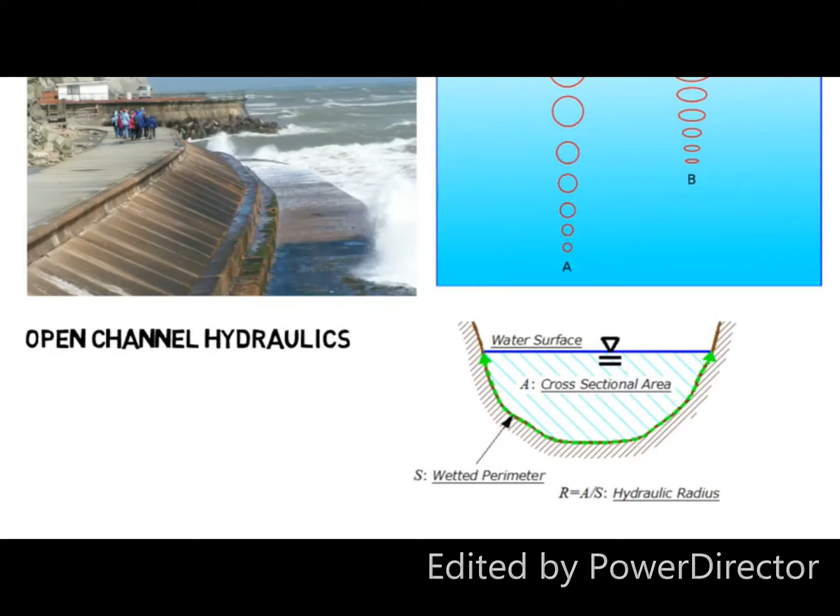And last is transportation engineering. This is about safe and efficient movement of goods and people. These are the engineers who design streets, roads, highways, railroads, public transportation systems, and even airports.

This engineer has to look at the kind of demand from a new development, whether it's a new stadium in your city, all the way to a new grocery store in a new location. This is going to cause new types of traffic throughout the area. The engineers would try to optimize how the new development impacts existing traffic.

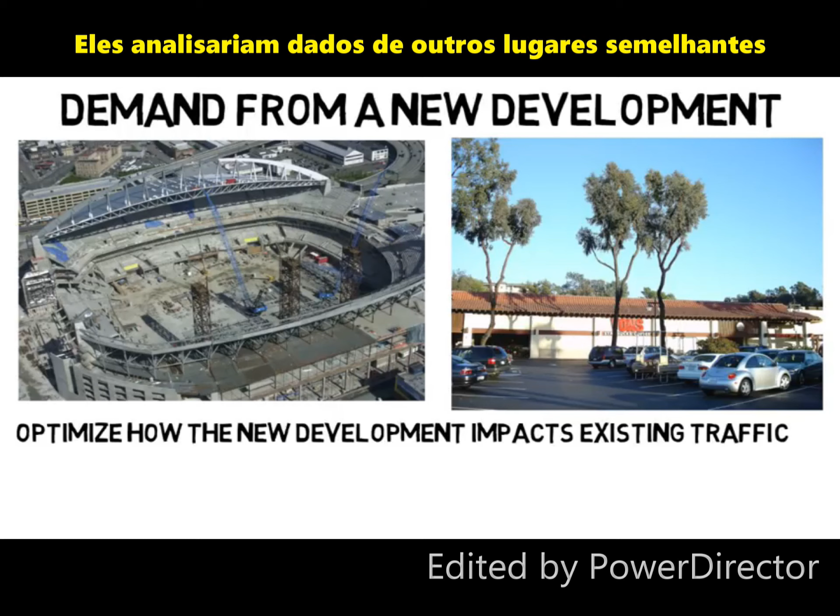They would look at data from other similar places to see what kind of traffic they get, then try to make improvements where possible. It could be simple, like adding a bus stop in the nearby area, all the way to expanding the roadway to allow for more traffic.

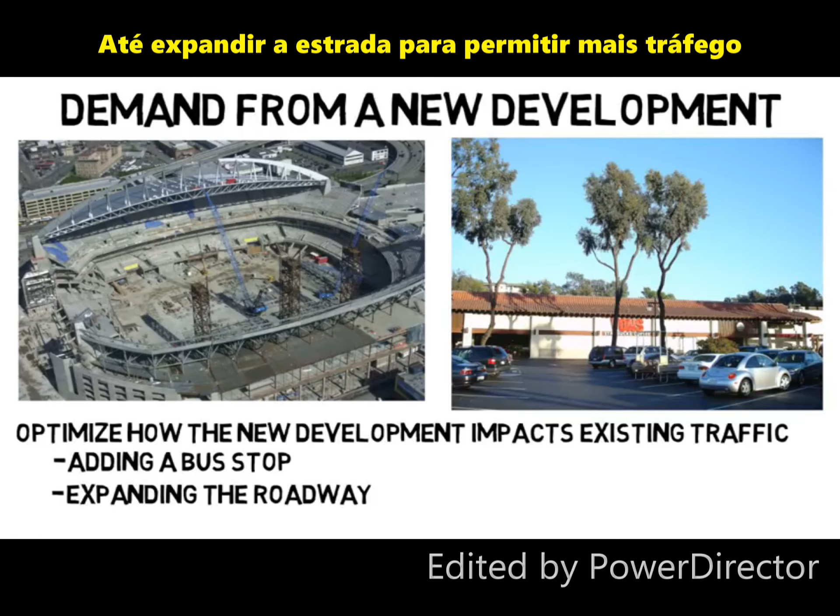They could work on the geometrics of the roadway, such as what radius of curvature an off-ramp needs to be for a car going 55 miles per hour so the tires won't slip. Or if they're going up an incline, the driver needs to see far enough ahead to stop if there's a sudden obstacle. Or what do the cross sections of a freeway need to be for the lanes and the shoulders to accommodate the amount of traffic that's expected?

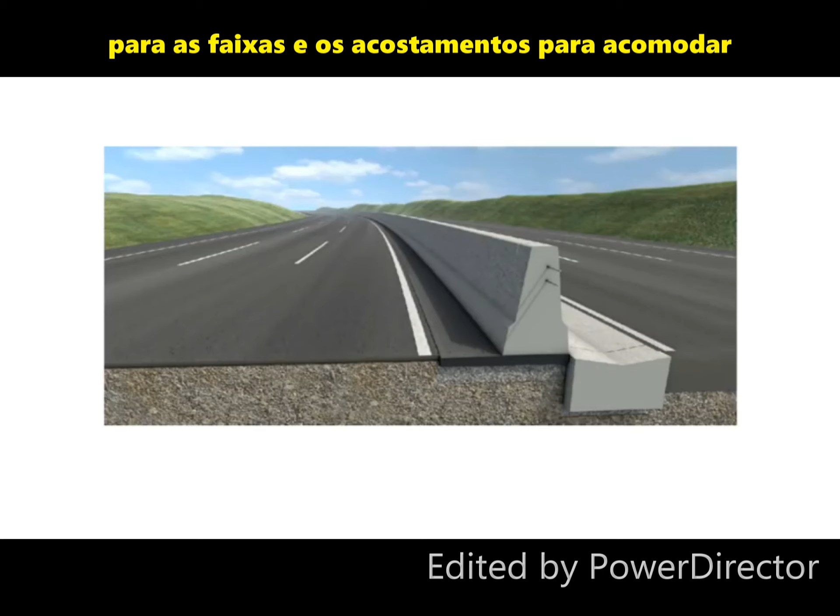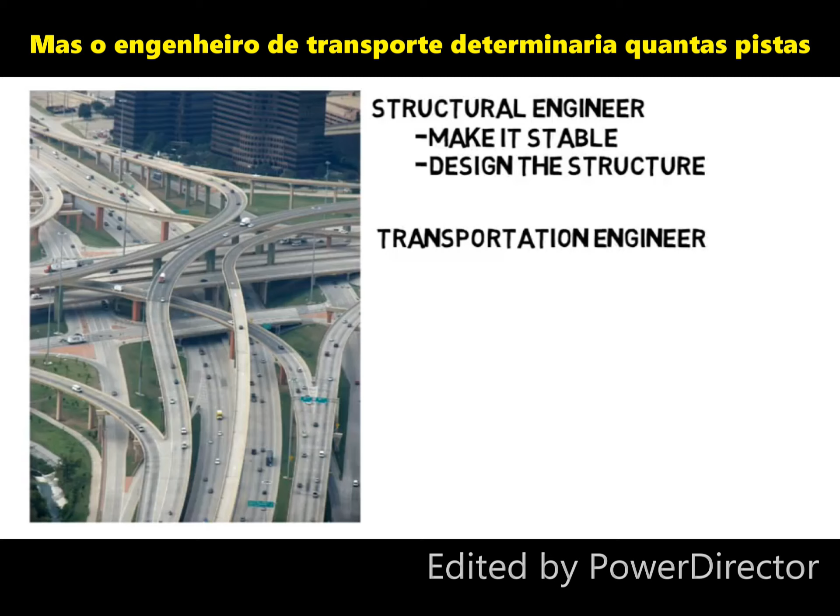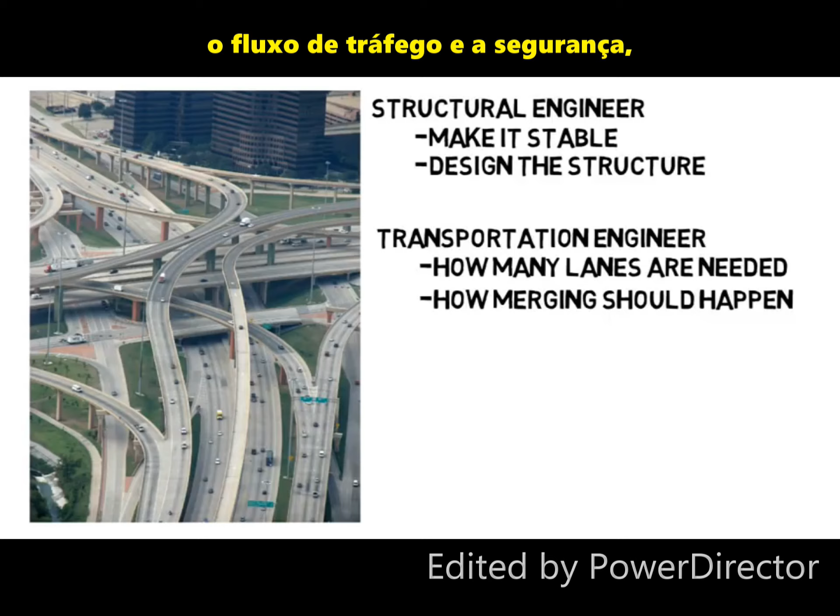Or let's say a highway interchange is being designed. A structural engineer would make it stable and design the structure itself, but the transportation engineer would determine how many lanes are needed based on traffic, or how the merging should happen to maximize safety. They make sure the layout is designed to maximize traffic flow and safety rather than the physics of the structure itself.

Often these engineers evaluate potential improvements to cities in terms of transportation rather than create a totally new design. You probably haven't had many new highways put into your city in the last few years, but there's probably been plenty of construction, whether it be adding an express lane or a bike lane, etc. So they might not create a new bus transportation system, but they may optimize the existing one.

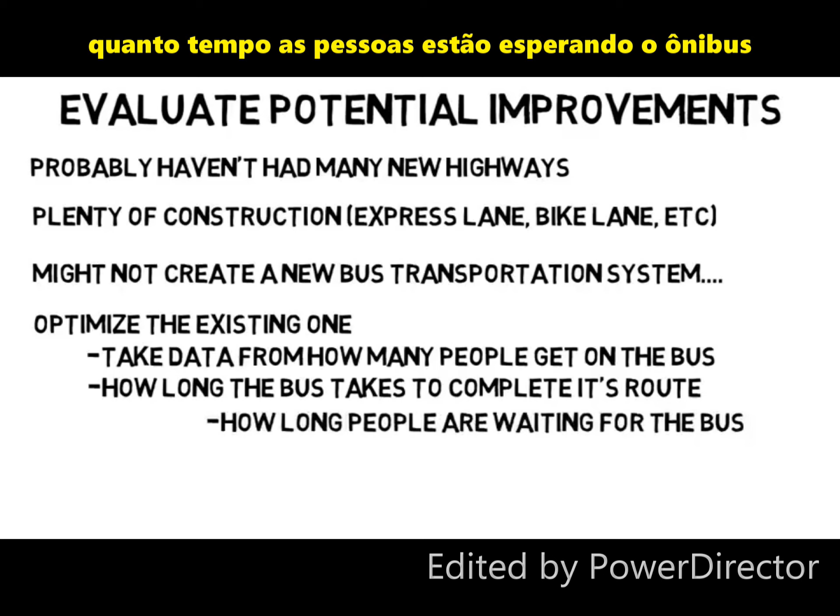Maybe they take data from how many people get on the bus, how long the bus takes to complete its route, how long people are waiting for the bus, and so on to optimize the route, the amount of stops, and more.

Your career will also likely involve a good amount of computer work. You might have to create a layout of the new lane, off-ramp, bridge, or whatever you're designing on AutoCAD, which is a very important software for civil engineers.

Or you could use software to analyze and simulate traffic. You could actually lay out the roadway of a city and use collected data of traffic during different times of the day and simulate new additions. Like you could add in a stoplight somewhere and see what the new traffic would be like. Or you can make a minor change, like making a certain stoplight stay green for just a few seconds longer, and see how it affects traffic on those streets.

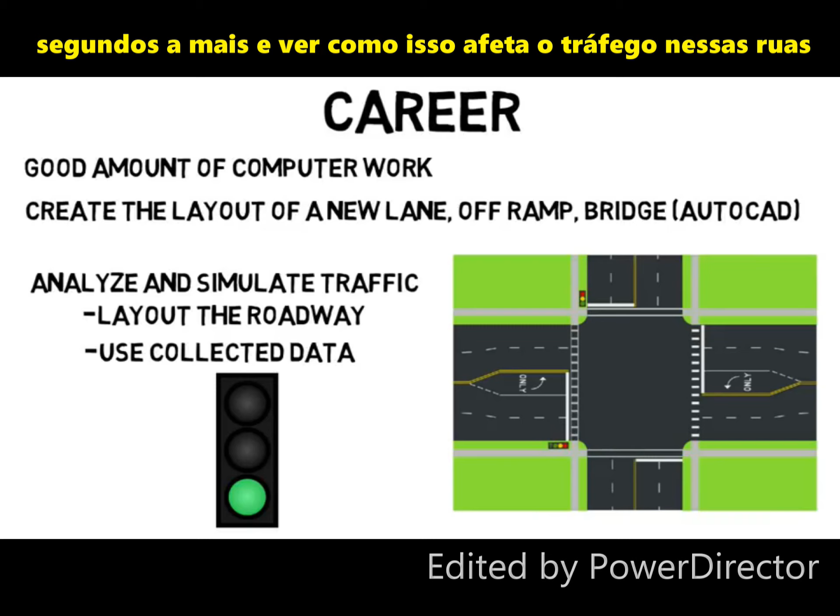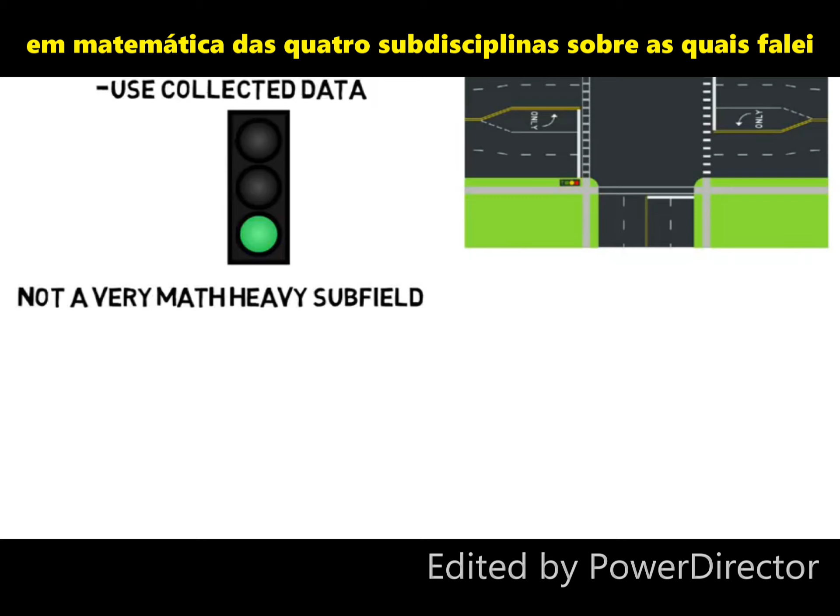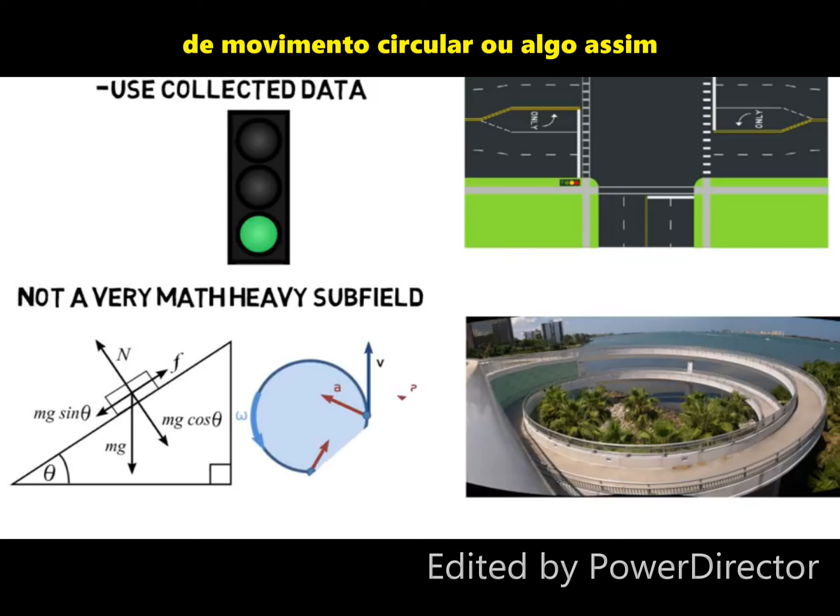Just note, this is not a very math-heavy field. In fact, it's probably the least math-intensive of the 4 subdisciplines I've talked about. It's more about taking data and analyzing it. Even when I talked about the radius of curvature and how fast someone should be going, you won't use the coefficient of friction and do circular motion physics or anything like that. You use even simpler equations to get what you need.

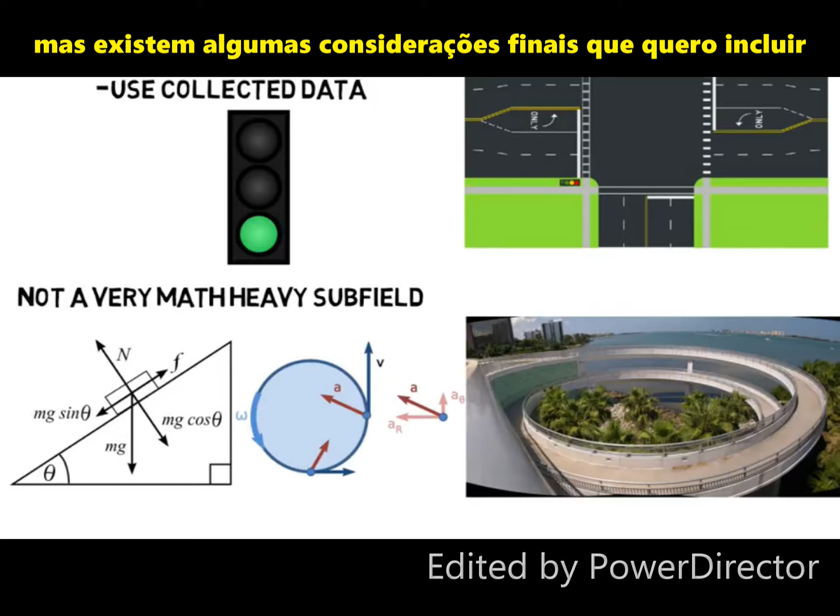Now that's all the main subdisciplines of this major, but there are some final thoughts I want to include. If you're watching all this and are more interested in the artistic aspect of building and structure designs, then architecture will be better for you.